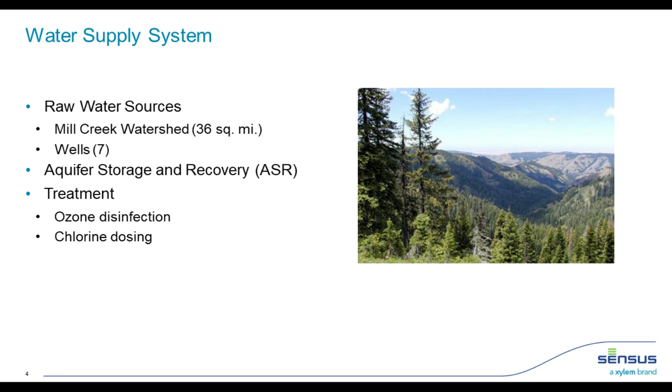Wells are a small portion of our water. We do have 7 wells. They are a full backup for our entire system, and we do have an ASR, Aquifer Storage and Recovery program, where we've stored about 10 years' worth of water underground.

Our water distribution system, the city is one of the oldest in Washington, established in 1862. Very old infrastructure. A lot of challenges that we face is managing this aging infrastructure. Our average steel mains are about 65 years old. We have a total of 191 miles of water main, and 91 of those miles are at increased risk due to age and need to be replaced.

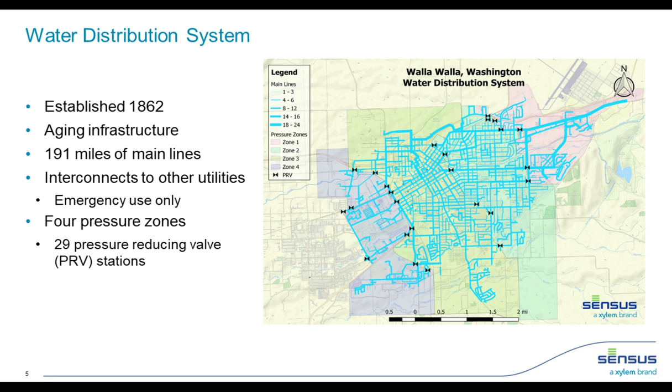We do have a couple interconnects with a small utility to the southwest for emergencies, and it goes both directions. We have 4 pressure zones, as you can see the shading. From the northeast to the southwest corner, we have an elevation drop, and we have 29 PRV stations that regulate these pressure zones.

One of the big challenges here in Walla Walla that we face is our non-revenue water. We produced about 3.4 billion gallons in 2014 with a water loss of 29.4%. It roughly is about 1 billion gallons of water lost annually.

Leak detection efforts, we've used traditional methods. We've done 2 complete passes of the city with acoustic correlators. With our steel mains and our rocky soils, we have a very high noise level. It carries a long ways in the steel mains, which takes a lot longer to pinpoint and find them. They don't surface, they go through the alluvial gravels. So it's very challenging. We have considered some in-pipe inspection for our large mains, transmission lines, that we believe we're not getting good leak detection with acoustic hardware. So that might be coming up in the future to help us out.

Capital investment initiatives, we have a great program. We call it the Infrastructure Repair and Replacement Program. We replace the water, the sewer, the storm lines, and the streets all in one pass. It's a good program. It's kind of the final resolve for getting our old aging infrastructure updated.

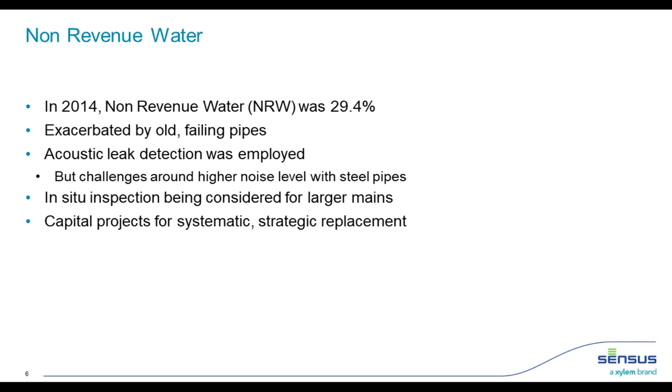Some of our metering solutions, I'm going to turn it over to Joe Dreyer. He's going to talk about where we went with it.

Thanks, Adrian. We completed our AMI deployment in 2018. We can collect over-the-air readings at hourly resolution. For our residential meters, we use the Sensus iPERL, and for commercial and industrial, we use Sensus Omni meters. We have about 11,000 meters total in our system.

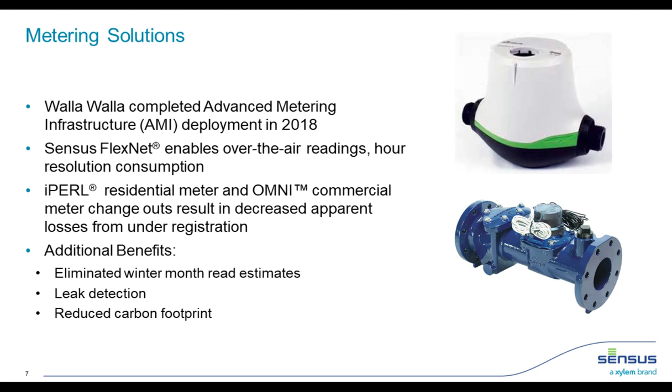So with the FlexNet, it's a really solid foundation. It's the backbone of our AMI system. It's the foundation for what we call a smart utility network. It's high power, low noise floor, and makes the system very reliable.

We have 2 radio base stations that read all 11,000 meters. You can see on the map that they're to the north and to the south. In red, we have 2 towers that cover the entire system. With 2 towers, it can read almost every meter independently, which makes it very reliable and redundant.

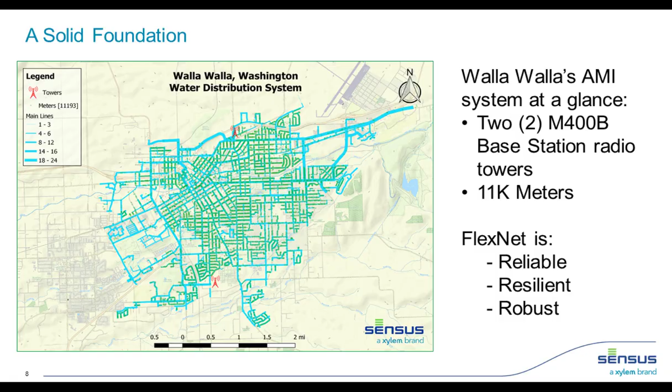I'm going to pass it back to Adrian now. Thank you, Joe. So as you described, that solid foundation, we really got to that stage with our system where it was very reliable. We had control of it. We were keeping it maintained, keeping it running. Everything was working right. So then that turned us to what problems can we solve beyond metering? We have this great FlexNet system to our advantage now, and where do we go from there?

So we started looking at some other applications. The first one that really came out was the pressure monitoring, pressure profile. Really exciting that we can see the system behavior. We can monitor asset health, detect breaks, and exercise really solid pressure management with the data that comes in from this.

Another hardware application that came with the meter was remote shutoffs for bill payment failure. We've also looked at using this automated valve for a number of applications. One is we're looking at flushing dead-end lines remotely. Creek level monitoring is another - flood warning, level trending, really emergency-based, so we can get a warning that creek levels are rising prior to it actually breaching.

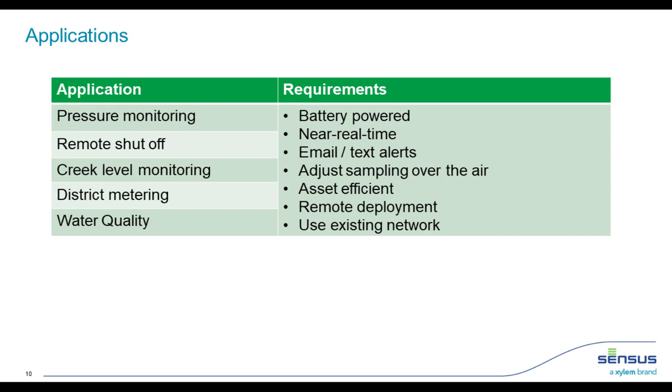The really exciting part is the requirements. It's battery powered. We can now put sensors, switches, controls pretty much anywhere we want. So that's really what opens up the possibilities and where these applications started taking off. I'm going to turn it back over to Joe Dreyer now to talk about some of the technology that we've used to apply these applications.

Thank you, Adrian. This is Joe Dreyer again from Sensus, and I'd like to tell you about two products in particular that Walla is using for pressure monitoring, level monitoring, and some of the other applications that Adrian just described. So the first product I'm going to tell you about is the Ally meter.

This is a new residential meter that has an integrated pressure sensor. It also has an integrated temperature sensor and a remote shutoff valve. This allows you to monitor pressure deep within the distribution system where traditional solutions might not be able to reach. It's a convenient way to gain system visibility, and really it's just a meter swap out, which makes it a little bit easier on the installation side of things.

The remote shutoff valve allows the utility to turn off a customer's water over the air, and that particular function has 3 states, including open, closed, and a reduced trickle flow.

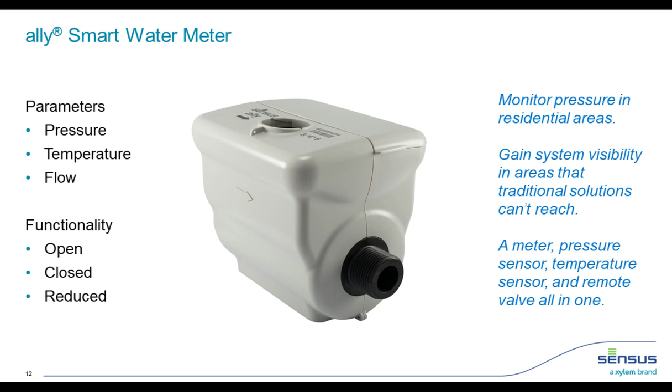The Sensus Smart Gateway sensor interface is essentially a FlexNet radio that can power and read sensors. This is the second product that Walla really leveraged to power the new applications. It can interface with 2 4-to-20 current loop sensors. Those are the milliamp output sensors that are very common in the water industry. And in addition to that, 2 contact closures.

It's battery powered, and it operates in the same network that they are using for metering. So the Smart Gateway is intrinsically safe, with Class 1 Div 2 certification, and it is rated for outdoor applications with the IP66 certification.

The Smart Gateway does support different sample and transmit rates down to the 1-minute resolution. The battery life will vary depending on the sampling frequency, and it can range from a little bit over 1 year up to 12 years or more, depending on how often you're sampling.

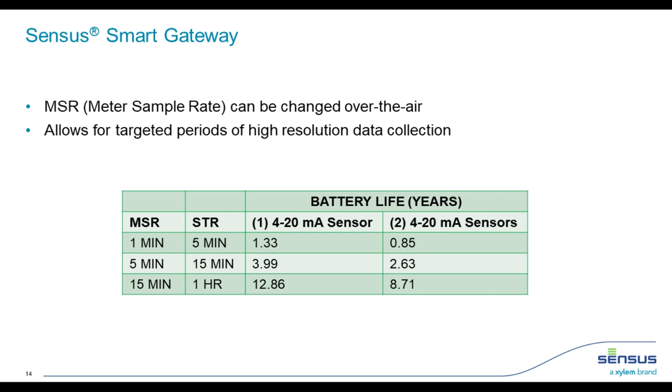You can actually change the sample rate over the air through the head-end system, and this allows utilities to collect higher resolution data for targeted periods of time if they wish. So for example, if you had 2 weeks and you wanted to collect 1-minute data for those 2 weeks, for instance, to feed into a hydraulic model, that's something you could do with this technology.

So Walla has leveraged these 2 products to implement their near real-time pressure monitoring in the distribution system. Before we get into the details of how they accomplished this and some of the insights that came from it, I wanted to share with you a little bit of background on the importance of pressure monitoring and some of the benefits that can come from it.

So why do we monitor pressure in the distribution system? When we refer to pressure monitoring here, we're really talking about pressure sensors located throughout the whole distribution system, reporting data in near real time. That could be hourly or even on a sub-hourly basis. This type of pressure monitoring is an important factor in each of the pillars of leakage control that are published in the AWWA M36 manual.

When it comes to the first pillar, pipeline and asset management, pressure monitoring allows you to detect changes in pressure. The utility is equipped to address the root cause of the behavior, which can help reduce fatigue stress on pipes. This, in turn, can reduce the likelihood of events like bursts.

When it comes to pressure management, pressure monitoring provides the utility with confidence in the full system pressure profile. The utility can understand how pressure varies across an area, a zone, or even over the course of a day. With pressure monitoring, you have a better gauge on the magnitude of opportunity for reduction — in other words, how far above optimum levels current pressures actually are.

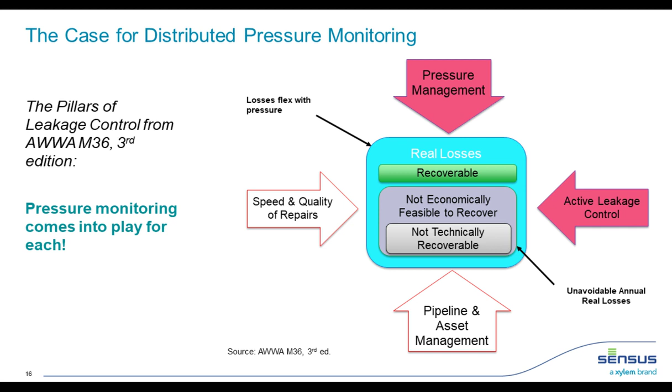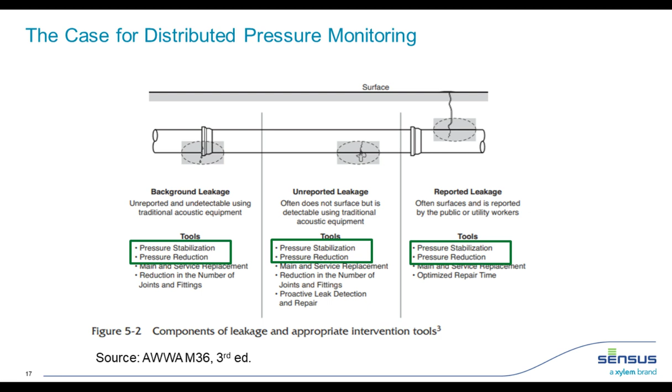The fourth pillar, leakage control, is explained in the AWWA manual and shown here in the graphic. It describes three components of real losses: background leakage, unreported leakage, and reported leakage. Each of these have pressure stabilization and pressure reduction cited as a primary tool for mitigation. At Sensus, we see pressure monitoring as the tool that helps a utility go about pressure stabilization and reduction.

When designing a pressure monitoring plan for Walla, we had to take into account a few important factors. The first was the overall number of points available, often driven by cost. We also wanted to make sure the highest and lowest elevations were captured in each zone, providing a range in pressure including the maximum and minimum. Additionally, hydraulic spacing, the distance along pipes from one point to the next, was important, and we wanted to maximize it for the best overall distribution. Since we were using an existing AMI network, network strength was important, but fortunately Walla has a very robust network, so this wasn't a limiting factor.

Finally, we wanted to be strategic in location types. We knew we wanted to place about 20 Ally meters for the remote shutoff use case - Walla had a list of accounts where they often have to go out and shut off the valve. We started with this as a base for pressure monitoring, shown as red icons on the map. We then added in the PRV locations since we wanted to monitor these critical assets, shown in blue icons. Finally, we filled in the remaining gaps with additional Ally meters, noted as green icons. That last part can be done manually, or you can use tools that run an algorithm to suggest the best locations. Altogether, we had about 100 points, or 1% of the service connections.

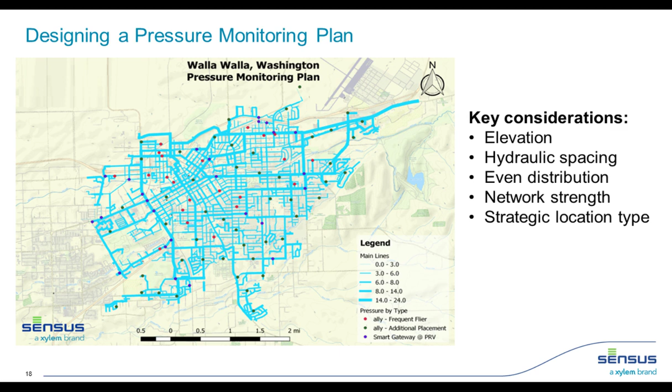Going forward, Walla is going to increase the density of the sensors strategically, looking at areas that are prone to issues or require enhanced visibility. I'd like to turn it over to Joe Dreyer now to tell you more about the installations of these pressure sensors. Thanks, Joe.

The first place we wanted to monitor pressures was at a PRV location. We wanted to measure upstream and downstream of a 16-inch PRV. The sensors we used have a 0 to 300 psi range, 0.5% accuracy, a 25-foot cable, and are IP68 submersion rated, making them perfect for installation in a PRV vault. The installation was pretty straightforward - we used existing pressure gauge taps. Not only are PRV sites good locations to install pressure sensors, but installing one upstream and downstream gives us the ability to monitor that the PRVs are functioning properly.

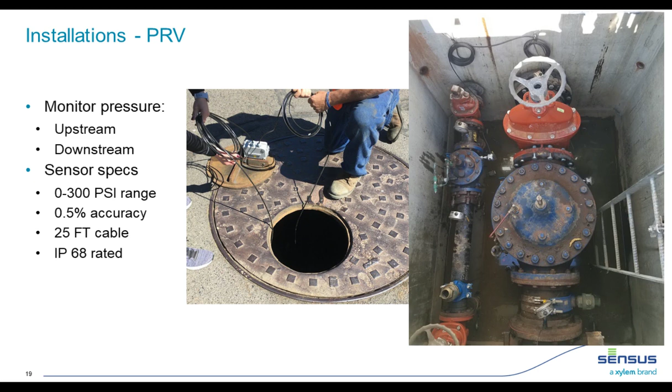Another option for installation was just at a residence or at commercial and industrial meters. The Ally meters mentioned earlier have internal pressure sensors, and Omni meters have pressure test ports that the pressure sensor can be installed into, as you can see in the picture on the right. So between the Ally meters, pressure transducers at PRVs, or Omni test ports, there are lots of existing facilities so you can easily deploy pressure sensors in your water system.

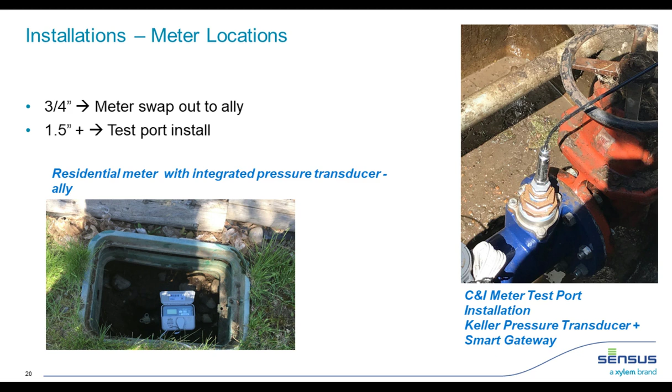I'm going to pass this back to Joe Dreyer. Thanks, Joe. This is Joe Dreyer from Sensus again.

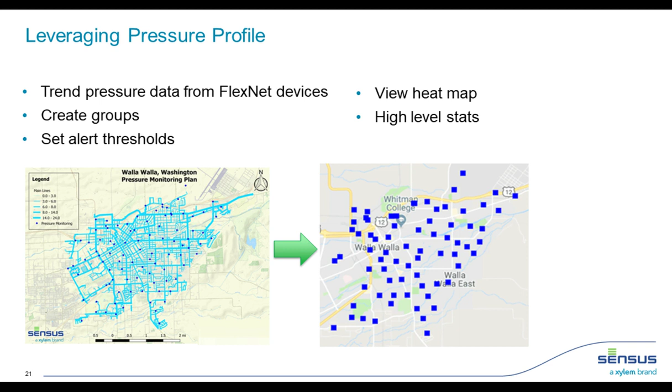With all these devices installed, Walla needed a way to view all this pressure data in one place. For this, they turned to a new software application we have at Sensus called the Pressure Profile. This is a tool used for trending and analyzing pressure data in the distribution system. In the slide above, you can see the initial design of the pressure monitoring plan, followed on the right by the view in Pressure Profile after installation of the monitors. This allows the user to trend out data and set up and view alarms. The data can be displayed in a map-based view or a chart-based view, and you can also do some grouping of the installed devices.

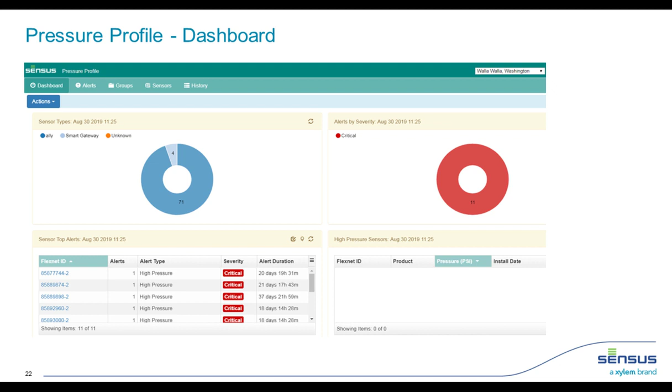So the dashboard page is there when you first log in, and it shows some key information on the system, including the installed devices, any active alarms, and basically you can create widgets that you can customize.

Grouping is useful for drilling down into the pressure data. So for instance, you can create a group that has multiple parent-child relationships, like Pressure Zone 4, Milton Neighborhood, 3rd Street PRV. And Walla used these to create groups for each of their pressure zones.

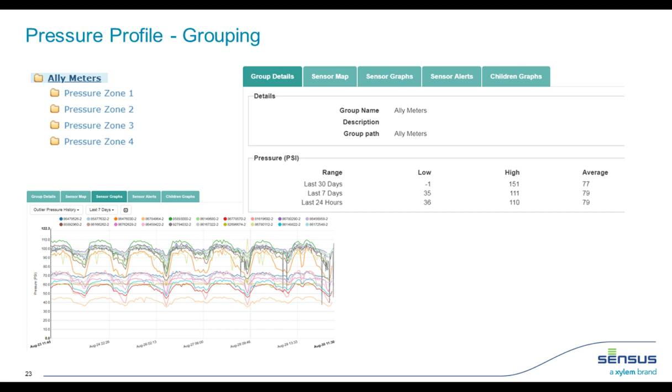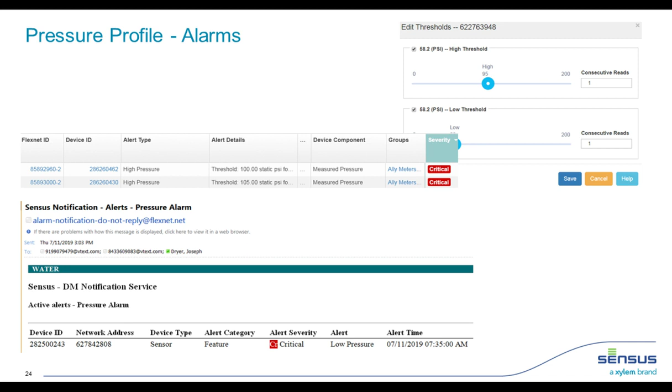Alarms can be configured on a device level, and they utilize a threshold that's set for high or low values. And these actually get pushed down to the installed devices, which means that as soon as they detect a reading that violates the threshold, they send up an alarm. And the alarms are based on a magnitude or a value, and then a duration. So for instance, 90 psi for 30 minutes.

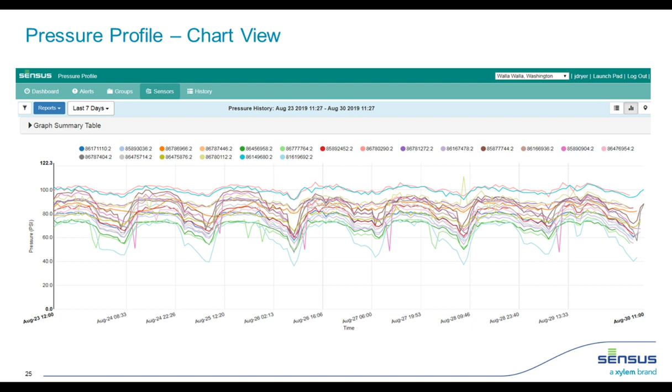So the chart view allows you to see data over periods of time. So for instance, 7 days or 30 days. And you can also filter by a group or even by pressure values. And then finally, the map view allows you to create custom display ranges for the pressure, and that allows you to create a heat map of the system. And you can actually play the data over time to see how it changes.

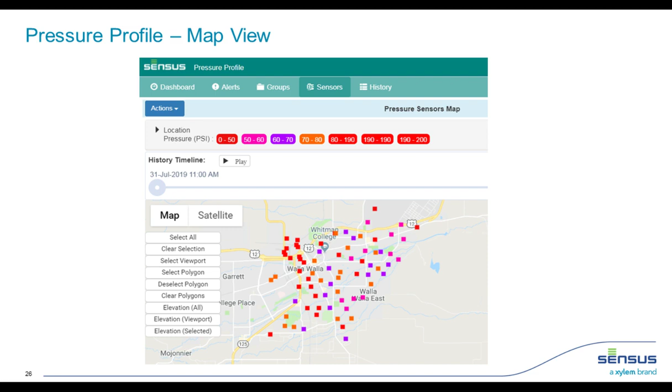So with that description of the application, I'd like to turn it back over to Adrian to talk about another feature that we implemented with Walla, and that being daily reporting. Thank you, Joe. So the daily reporting is really a snapshot, is what I like to refer to it as. The software application is very robust and in-depth. A lot of times as a supervisor, manager, or utility engineer of a system, you just don't have time to dive into that deep level of it.

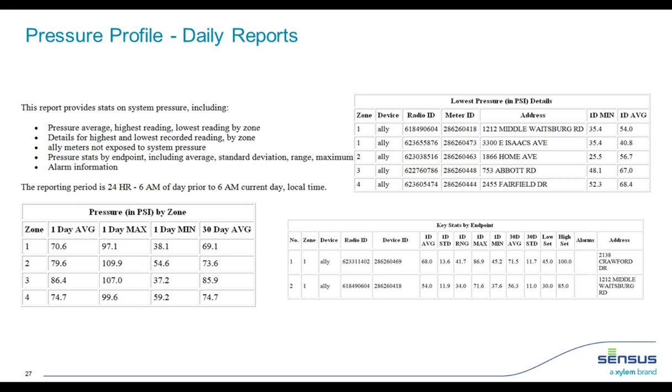So what we really looked at is we wanted a high-level overview, and how it works is the report comes in per email to me every single morning. I can open this report, look at this snapshot of the pressure zones. I don't have to log in. It's a custom daily report, very high level, but key stats by zone. So I can see very quickly everything looks good, or we do have an issue that we need to address. So I can get the data I need and go about my day very fast. I'm going to turn it back over to Joseph Dryer.

So one of the first findings we found was the impact of tank fill operations. We saw a pressure drop during tank fills and then a subsequent pressure rise after the tank was full. To mitigate this, we adjusted PRVs to smooth out the pressure trends. This helps avoid bursts and stress on the pipes. Bottom line is we see issues where we couldn't before, and we can get out and resolve them.

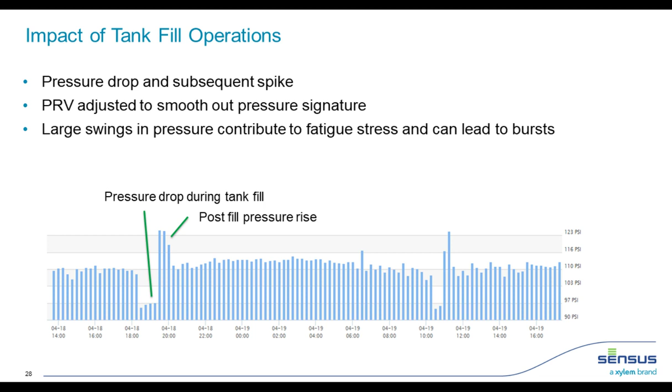Another finding was a low pressure area where a customer had called in complaining of low pressures in the mornings. We were able to validate the customer complaint with the pressure profile by taking a look at the data. This was in a specific area of town that had historically underperformed our hydraulic model. It's something we knew about, but were unable to determine the total impacted area and the cause of the issue.

Doing a little bit more investigation, we were able to work with some of the customers, our cemetery being one of them, to readjust their irrigation times. And another thing we were able to do was make adjustments to a pressure sustaining valve and keep the levels above 45 psi. So kind of a combination of things, we were able to mitigate the issue and stop the pressures from dropping so low.

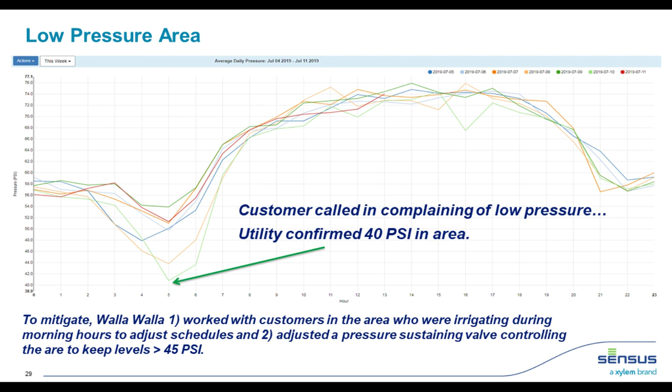All right, looks like we're going to cut it off there. So we have a mix of responses here. One of the more common ones is pressure too low. Certainly I could understand that. If you have pressures that are dropping below critical thresholds, that could impact water quality, and there could be regulatory consequences to it. So definitely something you want to address with pressure monitoring.

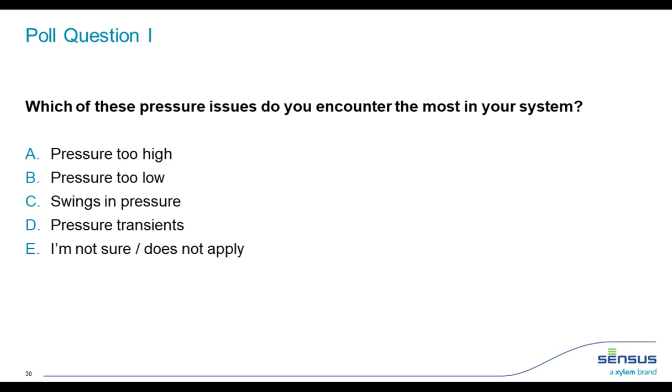On some of the other points there, pressure too high or swings in pressure, Walla Walla has encountered some of those, and I think Joe Dreyer is going to talk about some examples of that. So with that, let's turn it back over to Joe Dreyer and walk through a couple more examples.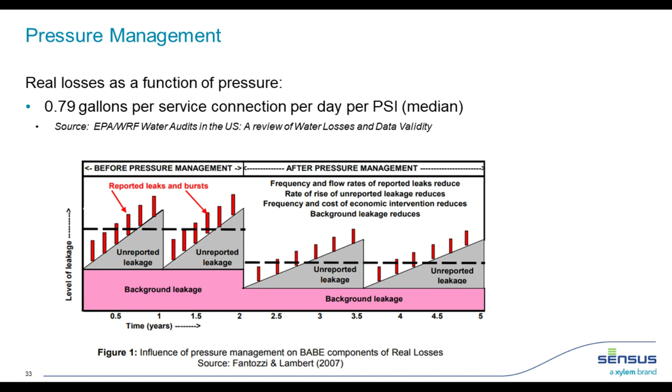You do have to be very careful with pressure management to keep your minimum pressure levels maintained. It's a great platform for that. We can tell hourly if we are maintaining those, or if we have a dip or we're headed down too low, and we can make adjustments. Very important for water quality and fire flows to keep your pressures up also.

In the past, a daily average of pressure, or 1 point, or just points at your well houses or pump stations, it's really not enough data to diagnose. You get an idea, but typically it was go put loggers out for a couple days, then come back, get your data, try to figure out what's going on. With this real-time data coming in, it's very fast to diagnose an issue and get a truck rolling to resolve it.

As I mentioned before, we're really looking to reduce our pressure in the winter. We're going to start in zone 4, our very bottom zone, and we're going to drop the PRV set points in that zone to see what kind of reduction in non-revenue water we can do throughout the winter months, non-irrigation season.

In the future, and it's actually this week, I'm pretty excited, we're using another application of the Ally meter for a prototype to automate dual pilot controls on a PRV. So we could actually go from winter settings to summer settings with the push of a button in the office. So that's a pretty exciting other application that we're working on right now.

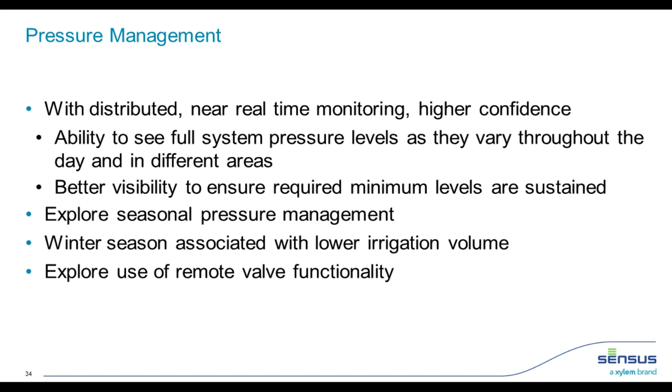That causes a ton of stress on the pipe, and our assets are already failing. So we really wanted to smooth that out, and it's just a great example of being able to see what is actually going on in the system. So the wear and the tear on the assets was really a big one for me.

This is where I get kind of excited with the call-out part of it. And in another instance, we had a quick response time. Our on-call staff knew, hey, I got a pressure problem. This is the area it's happened in, and we had a truck rolling that night prior to even a customer calling in. So really exciting instead of somebody just running out there and not knowing what they're getting into or what's going on. It's, this is the issue and we're going to get it resolved.

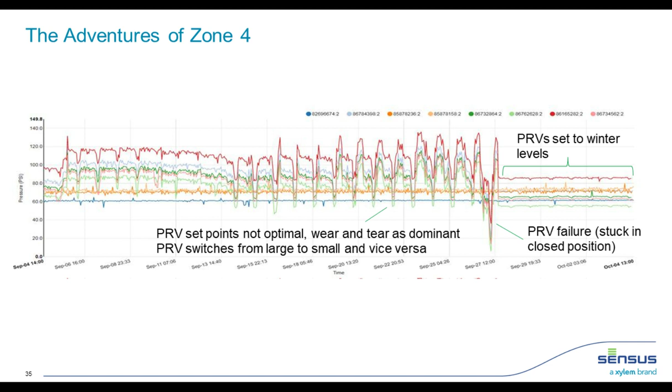The last part of this graph you see is where we've actually set it down to winter settings and readjusted those PRVs to work together, and you can see the stabilization in pressure, and that really extends the life of our assets and protects us from pipe bursts and such.

So going a little beyond, moving on from the FlexNet metering system where we started, we got the system up, running metering, maintaining it, everything's working good. The pressure profile, getting into pressure management, we started looking at other applications that we could utilize using this existing platform to create not only a smart water system, but now start creating a smart city or smart utilities.

We also wanted to look at blockages. We have a lot of bridges throughout town, so blockages of debris and logs or ice dams that could make this much worse. So we wanted to look at a monitoring solution that could be deployed anywhere for essentially emergency.

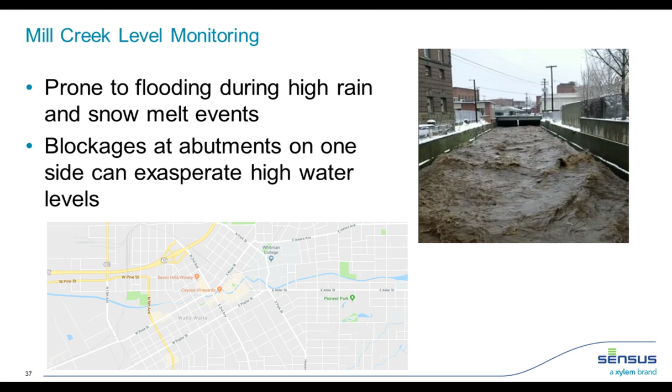Some of the hardware we used was the MJK 1100 series level sensors, and then we wired them to a smart gateway which comes into the FlexNet and the regional network interface. Installation, we put the level sensors in stainless steel enclosures that we built to protect them, and these were mounted at a bridge.

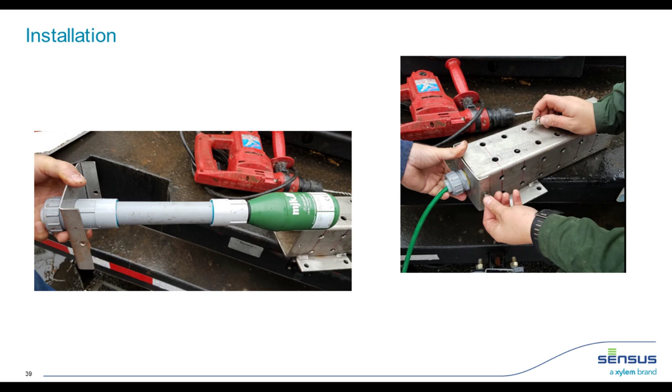So a couple examples of what we did here. We have the upstream and the downstream on the center abutment of the bridge. The gateway on the last picture is mounted up near the pedestrian rail. All of this doesn't require any power. It's all run off of the smart gateway, and it's battery operated in our own AMI network. So this is how the hardware was installed, kind of how it works.

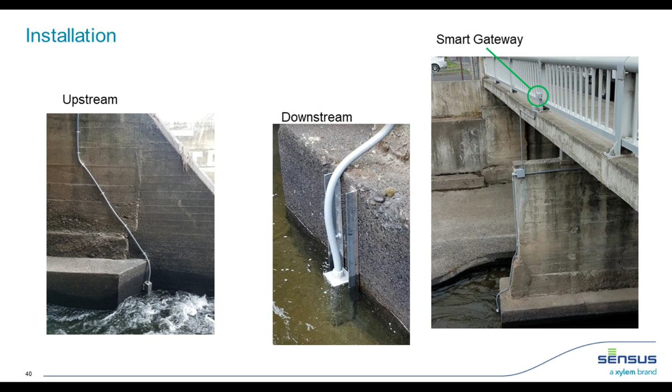I'm going to turn it over to Joe French now. He's going to walk you through the setup in the RNI side of how you get it set up for parameters and what alerts and alarms you're looking for. Thanks, Adrian. So now that the sensors are installed, we can start collecting the data and set alerts, kind of tell us what we want to know about what's happening to the creek.

So in the RNI, we can set alerts and thresholds of our level here. We wanted to set it a little bit lower just as a test. We set the initial threshold alert at 5 feet or greater, and alerts were sent out or can be sent out via email or text, and they can always be adjusted over the air if needed.

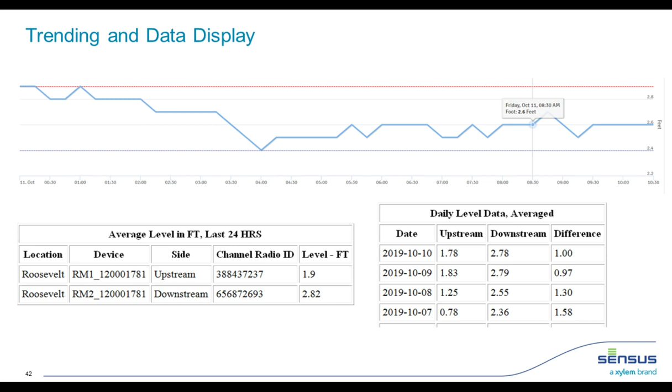This is kind of an example of how the info will be displayed in the RNI. We have a graph and also a table view. The snapshots of the report below are sent via email daily. This is similar to the reports that we looked at earlier with pressure. Pass this back to Adrian now. We can talk about a high rainfall event that we had recently.

Upstream and downstream levels do rise fast, and the upstream exceeds the downstream level. It's a little bit in how the channel's built too, where you see just a small separation between the two. The differential that we were really looking for with upstream and downstream, and we're still working with Sensus on, is that blockage in that dam.

If you started getting a partial blockage or blockage, we're going to start to see that differential separate into two different levels of water. We were hoping that's where emergency personnel would be dispatched to go out there and say, we believe this bridge is partially compromised or blocked.

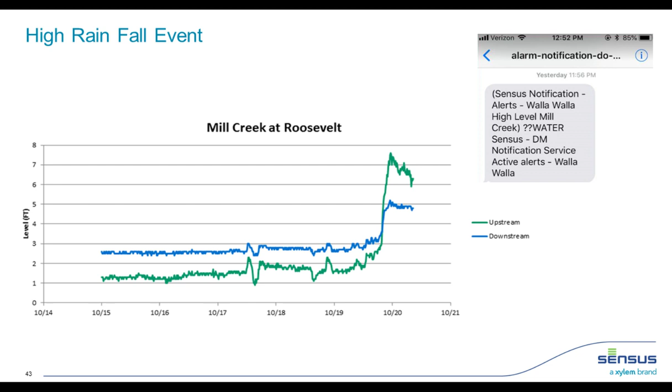So the other application that we've deployed with the pressure profile and pressure management system in place already was the remote shutoffs. The Ally meter has this built in, and it's a great feature. The business case for us, we have a small deployment that we put out currently, but it is very much time-saving and money-saving for truck rolls. The cost of an Ally for us has returned in about 2.8 years with our $15 per shutoff figure. This is based on, like I said, a very small deployment of Ally meters.

Other utilities might have a greater benefit for this if you have long travel times or many more shutoffs you're trying to do on a weekly or monthly basis. So other utilities, other than Walla Walla, might find a much greater benefit for the remote shutoffs. Our installation locations were based more on pressure management than the frequent flyer customers.

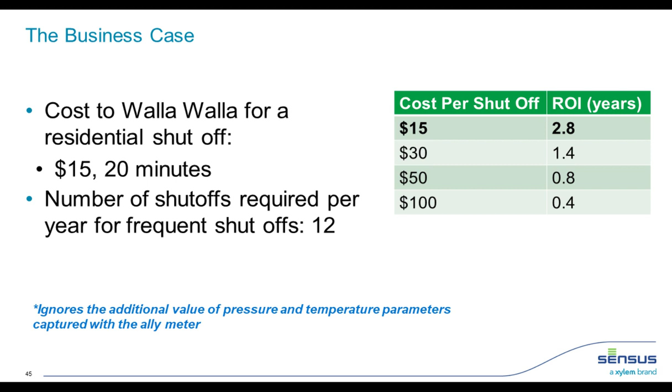For instance, we used it for dogs in yards that have always been a problem. We have potential disgruntled customers where we don't want to send staff into that yard. Cars parked, this happens to us quite frequently on shutoff day. The old car is parked over the meter box, so right now we can just shut their water off from the office. We don't have to have more trucks roll out there to take care of the issue. So it's a great feature, and I could see large utilities really utilizing it.

Some of the methodology and how that works, I'm going to turn it back over to Joseph French. Thanks, Adrian. So with the middle-of-minute communication mode in FlexNet, this allows us to have a response time for commands of less than 5 minutes. So we can change the valve state pretty quickly over the air. There are a couple of valve states that Joe Dreyer mentioned earlier. There's a full shutoff or a trickle mode.

We actually installed an Ally meter at one of our employees' houses, and he volunteered to live for a day or two on the reduced mode just to see what it would be like, and he really wasn't very happy. He said he'd fill a glass of water, but that's about it. A shower was definitely not going to happen.

Another thing with the Ally, the pressure sensor is on the system side, so if we do shut off the customer or the valve, the monitoring application isn't impacted. It's really a great device, and we're pretty happy with all of its applications right now. I'm going to pass it back to Adrian.

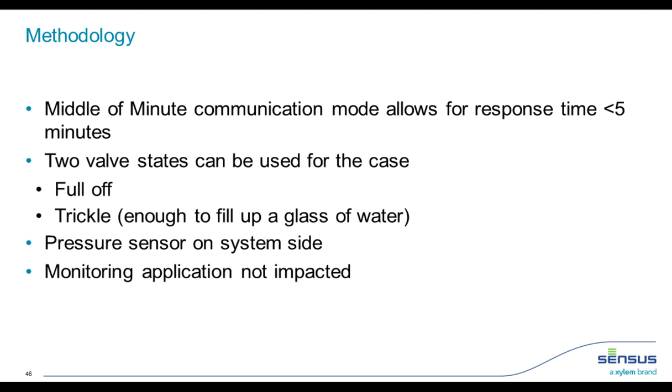So looking towards the future, we've already done some level monitoring kind of out of the box for water, pressure profile, and we still want to push it forward. There's a couple more applications that we're already running through their paces, and there's more to come for ideas that we have. This is where it really gets exciting for me, that this is just the beginning. We are understanding the capabilities of what we can monitor, what we can control, and so it's really getting outside the water realm box and looking at wastewater and stormwater and other issues.

You can see in the pictures here, we have set up a temperature sensor. This is below the effluent of our wastewater treatment plant. This is really a proof of concept for them. They have to try to get down in these rocks in the wintertime, and so we're able to bring in a daily report and send it to them of the temperature below their effluent and how that's impacting the creek. It also logs all that data, so it's a great resource.

Another site we went to is one of our industrial plants. There's a dissolved oxygen and pH sensor in the wastewater system right inside of a manhole, and then we just put in a smart gateway, and we can start reading pH and DO every 15 minutes, looking for them to exceed their BOD limit, or if they do a major cleaning and it's a really high pH, we know that's coming to our wastewater treatment plant before it actually hits it.

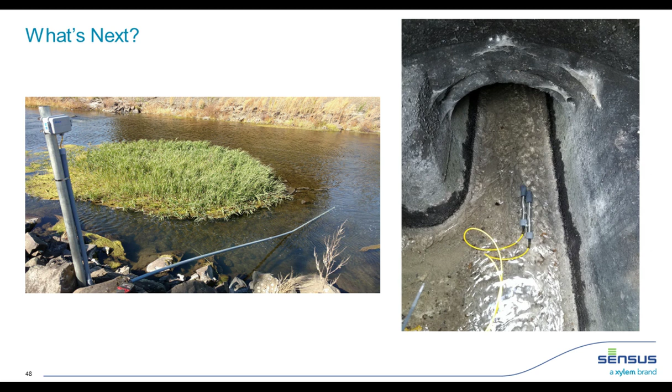Thanks, Adrian. So to summarize our discussion so far today, we've provided you with some background on Walla Walla and their transition from regular AMI, if you will, to a smart utility network. They're using the same network that they use for metering to power new applications across the water cycle, including pressure monitoring, level monitoring, remote shutoffs, and even things like temperature, DO, and pH monitoring.

They found benefits on the operations side with increased system visibility and response time, and they're better equipped to tackle the most important challenges that they face, including non-revenue water and aging infrastructure. So with that, I'd like to open it up for some questions and maybe a little bit of discussion.

Great. Thank you very much, gentlemen. Yeah, we do have several questions coming in here. Joe, I'm going to stay with you really quick. Just generally speaking, to sum up here before we get into some other questions, what are generally the best points in the system to monitor pressure?

Yeah, definitely. So, at Sensus, we really believe in an asset-efficient approach in terms of deploying pressure monitoring sensors. And what that means is using existing points of access. So, for instance, a meter connection, an existing sampling station, maybe if you're in the southeastern United States, even a backflow preventer. Sometimes those are above grade. Test ports in commercial and industrial meters are a great option. And what all of these have in common is that they're existing points of access. The installation goes quickly without a lot of capital costs.